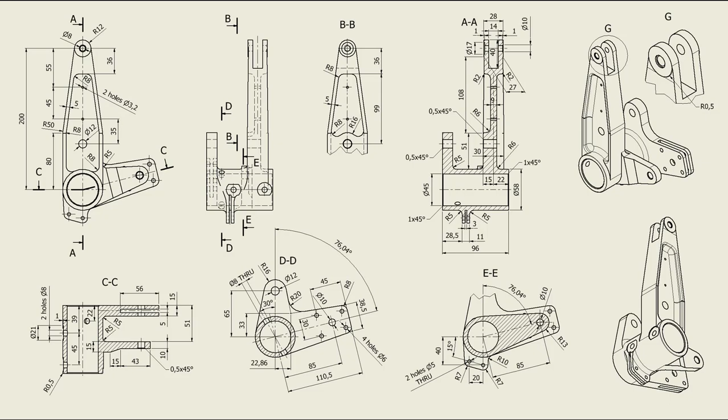I found a tutorial on YouTube in which this part is modeled. Rocky Lever is the name. In my tutorial you have the link in the description, so you can study that tutorial. As before, I saw a modeling strategy that I didn't like, so I decided to present my strategy to you.

You see, there are some features somehow complicated. If you look to the drawing, you see all the situation. These are two presentations of the object in 3D, and the dimensions are all over here.

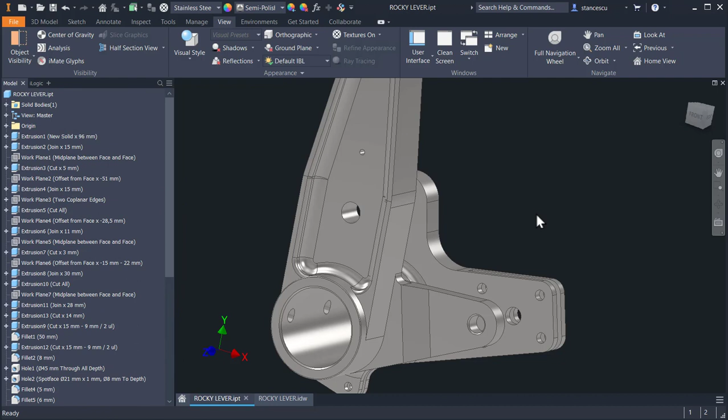The part itself is this. This is what we want to create, yes, with a lot of features. Look here. You understand that I created myself the drawing and this part. We respect the drawing and we create the part as usual. Let's go.

The first sketch is placed in the XY plane. We create a circle with a diameter of 58, and then we draw a contour. Take a look here where you see what I want to do. This contour I want to do, dimensions are here.

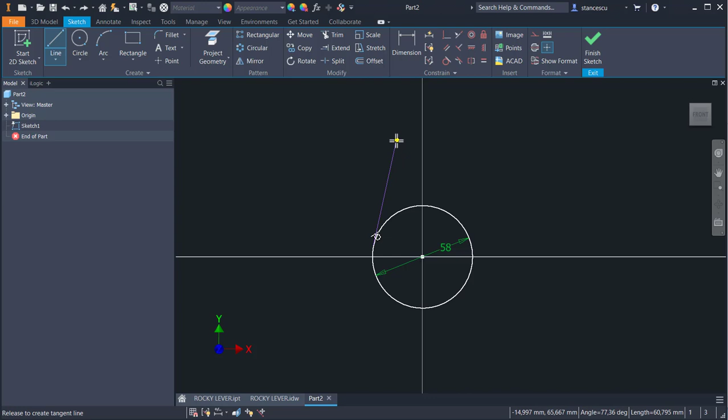We select a point on the circle, click, keep pressed the left button, and then we draw a tangent. Now, also keeping pressed the left button, we draw an arc, and then another line, another one, and the tangent as final. Is this difficult? I think that everyone can make such a simple thing.

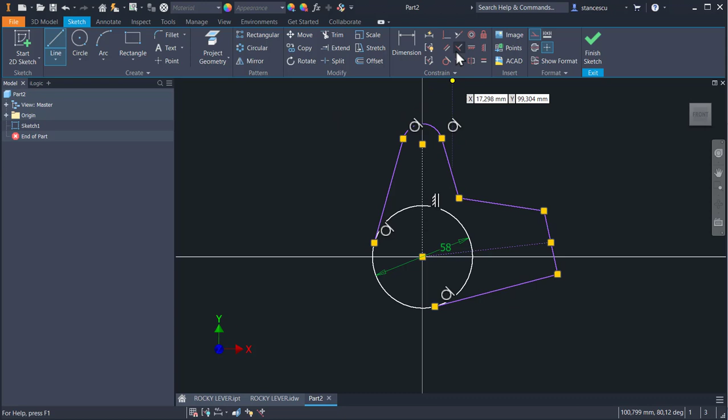I enable construction line and I draw a vertical line. You see the mark of vertical and a line to the center green of the other line, as you can see. I apply perpendicular between these two lines. I disable construction. Now dimensions.

Radius of 16. Distance from the centers 65. This line with this at an angle of 76.04.

This point at a distance of 22.86. In the mentioned tutorial, this dimension is missing, even if it is placed in the drawing. This is 33, and now we apply here 38.5 dimensions in the drawing.

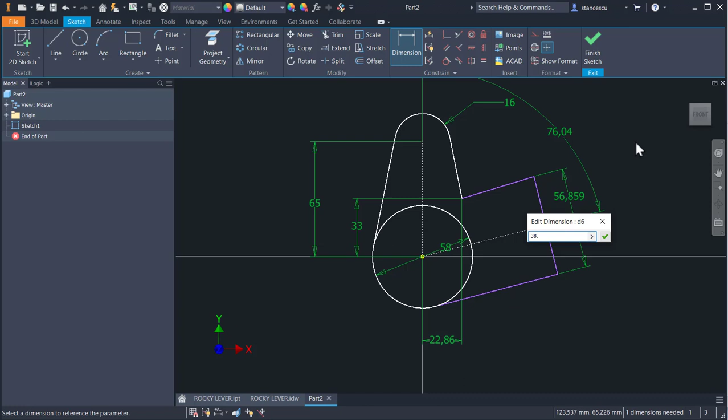The length 110.5, and this is white. This means fully constrained, as you can see. Okay, we have two closed contours here. One is this and the other is this one.

We create two extrusions now. Extrude this on 15, you see this in the drawing, and plus this one of 96.

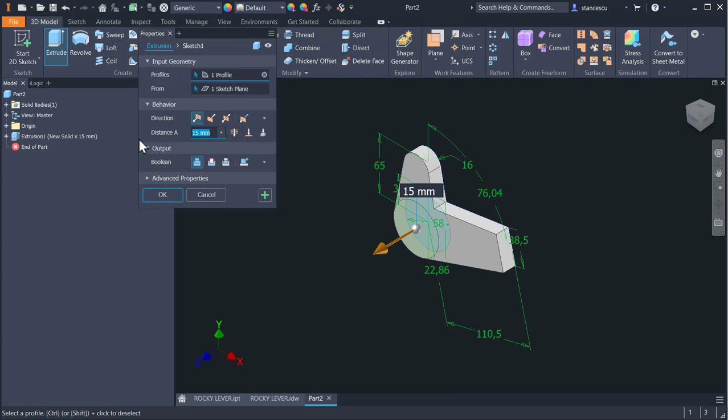Okay, F6. Now I want to apply material because I want to see the final presentation from the start moment. Stainless steel austenitic, and I accept the semi-polished appearance of the part.

Now, if you take a look at the drawing, there is a fillet here with the radius of 20 and two ends with radius 8. This is 20, plus this is 8, as well as the other.

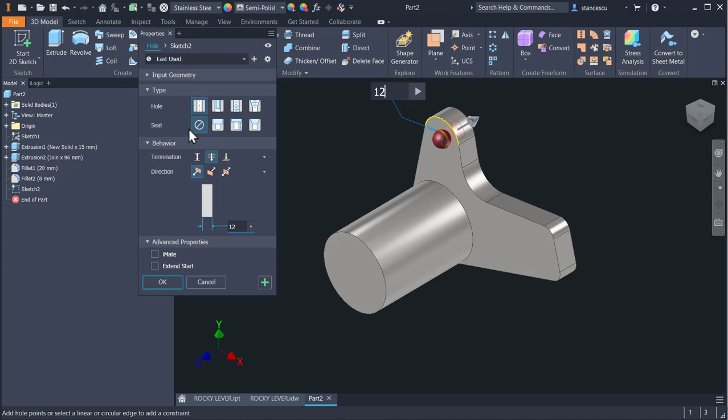Okay, now to finish this feature, I apply a hole here. This is the face, this is the center, and the diameter is 12 through. Okay, now I want to make a cut.

This 56 and a thickness of 5 in the middle of this extrusion. Then let's create a midplane between two planes, these two planes. Then a sketch F7 with a single line between these two lines, but parallel to the end line at a distance of 56.

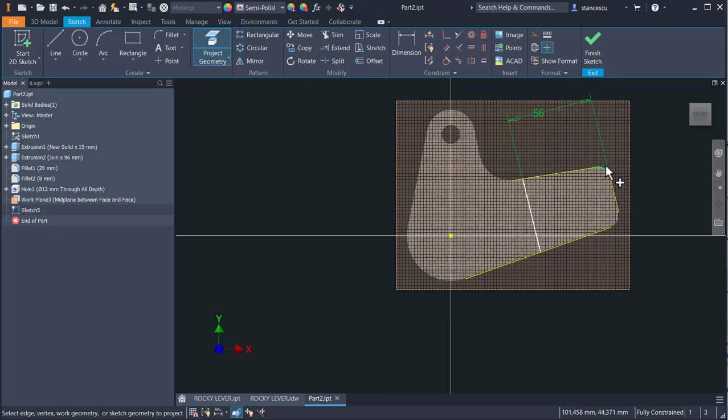Good. Let me project these two arcs to have a closed contour, and then extrude symmetrical with cut on 5. Okay, this plane is no more interesting. Good.

Now let me create these 4 holes, then this one. Sketch. We have 2 points. We add a line, again a line, which is also parallel to this line at a distance of 45.

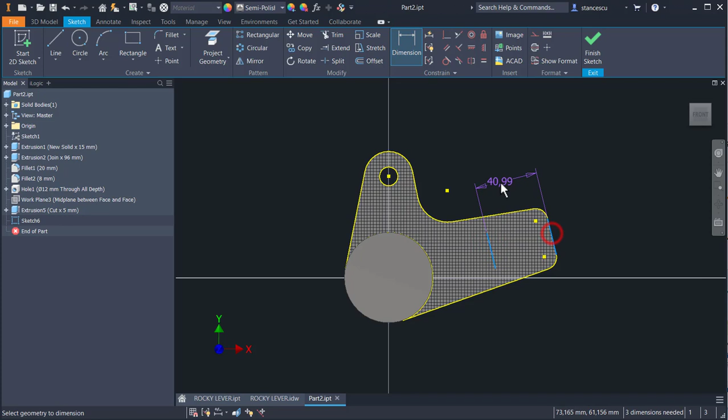F7 to see inside. I draw a line between the center point and this midpoint to apply coincident the midpoint with this, and here 30. I place 2 points at the ends of the line and other 2 here to have no problem with selection. Fully constrained.

Finish sketch. Holes of 6. All of them are selected automatically and they are through. Yes? Okay. The other one is in the middle.

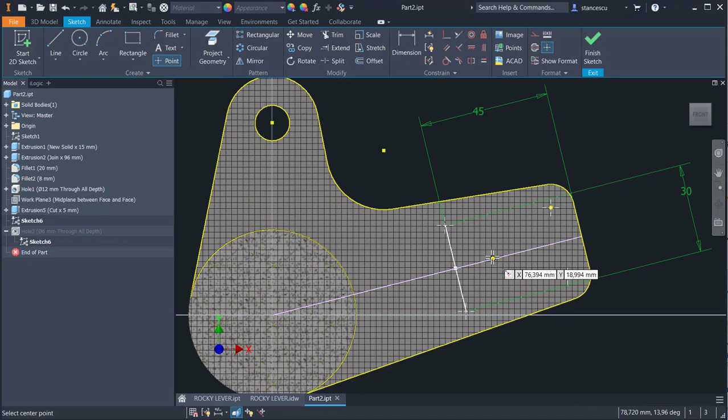I reuse the sketch, make it share. Why? To use that sketch, F7, to place a point on the line and then a dimension of 85.

Finish sketch. Hole 10. This time is 10. Okay. The shared sketch must be not visible because we don't need it.

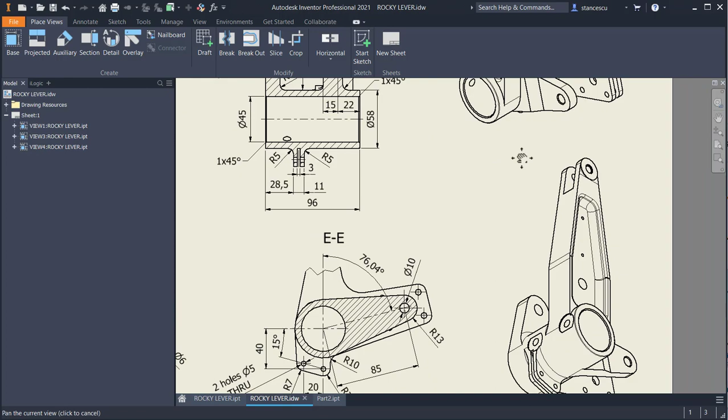Good. Now we focus on this extrusion, which is here or here. Yes. The distance is 51. 15 is the thickness, and then we'll cut this. So let's create this contour at 51.

Plane minus 51. Sketch F7. Project. Oh, but I want to project all the circle, so I apply again F7, project geometry, this, and F7 again. Yes, this is a little trick.

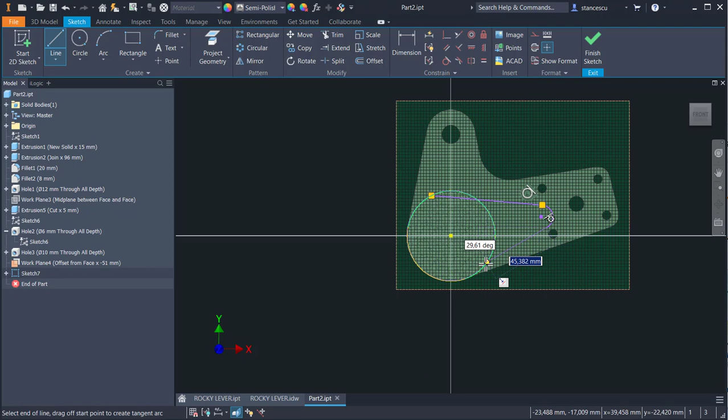Now I draw a line from a point on the circle, then an arc, and go back to the circle. I apply tangent between this and this. Okay. I draw again the line between this and the midpoint.

I make this construction line and apply coincidence between this. The radius is 13, and the distance between these 2 points aligned is 85. You see, exactly over this, but because we have 85 in 2 places, I have to respect the independence of these 2 features. Finish sketch.

Extrude this contour the other direction on 15. F6. Now we apply the cut: 43, 15 and 10 at the start.

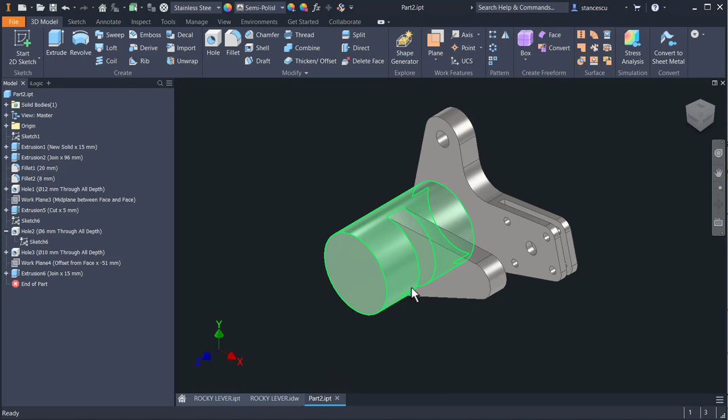We have to create a plane between these two axes. Axis, axis. I activate plane, create axis, this is axis, create axis, this is the axis, and now look at the plane.

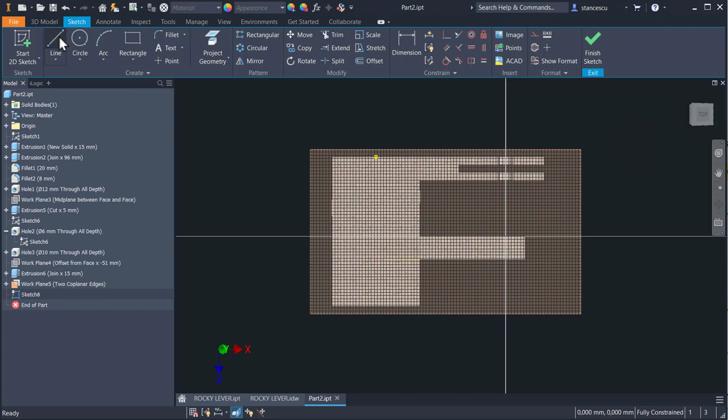I want to have the same position, so I create the sketch here. F7, I project one line, two lines. I make them construction lines, and I draw 1, 2, 3, 4.

Dimensions 10 from this to the end, 15 here, and 43 the other. It's fully constrained. Extrude the sketch, symmetrical, cut all the way.

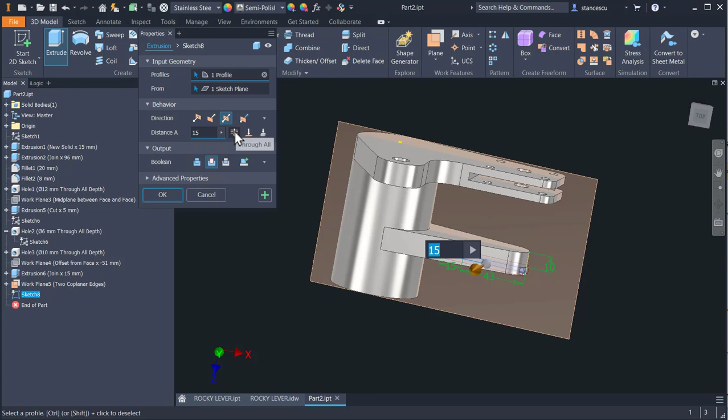Now plane. F6. This feature has also a hole with a chamfer. The hole is of 10 in the center of this cylindrical face, 10 with the chamfer. Hole, face, center, 10.

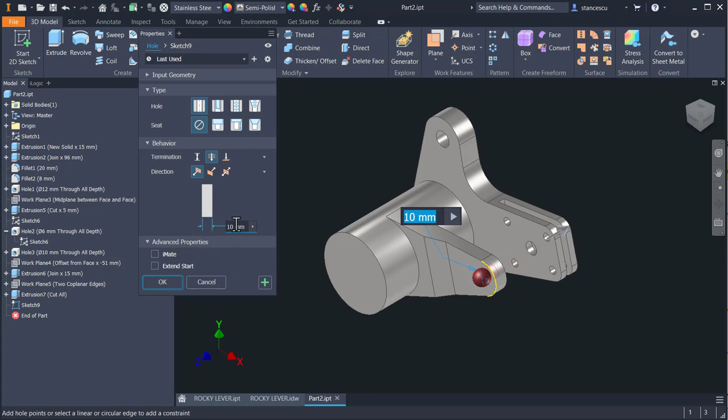I know that the hole is exactly aligned with this, but I apply 2 because the features are independent. And now the chamfer of the 0.5, and we finished also this feature.

The next is this one you see here, which is dimensioned here, and it is placed at 28.5 from the other end of the, oh no, from the bottom as well. Yes, and the thickness is 11.

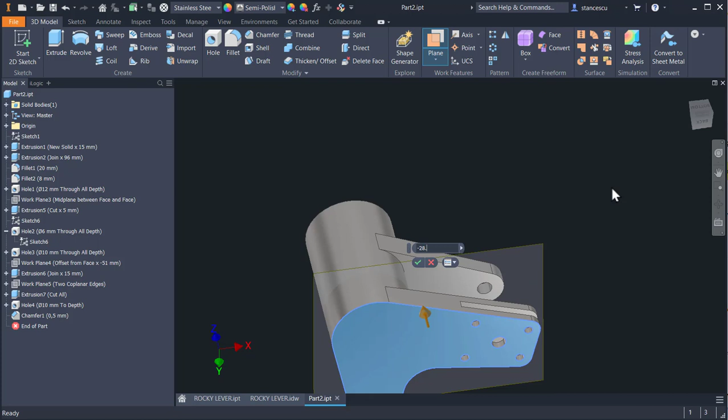Let's create a plane at minus 28.5 where we draw a new sketch. We project, you know the lesson. I project and then F7, and I have the full circle here.

Good. A line from about here, tangent, an angle, and to the circle, which is vertical. This end line is vertical. I project as constructive or construction the x-axis. Why? To place here an angle of 15.

I move a little this point to have room for applying these two fillets on the sketch. You see, because we need to have points for dimensions 20, and this one is on the same vertical with the center point.

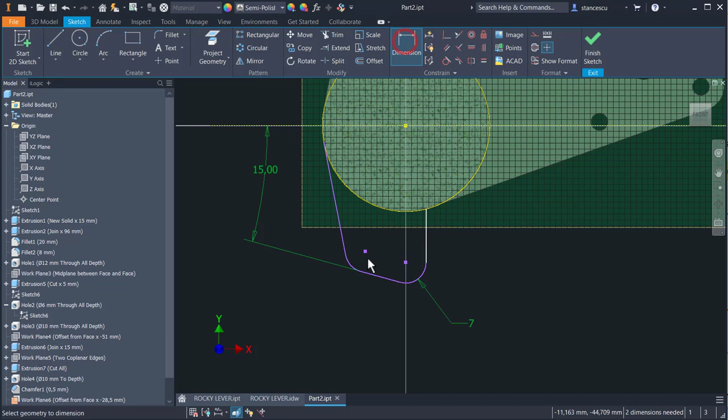The distance between this point and the projected axis is 40. This dimension is 20. And that's all. Very nice. Finish sketch.

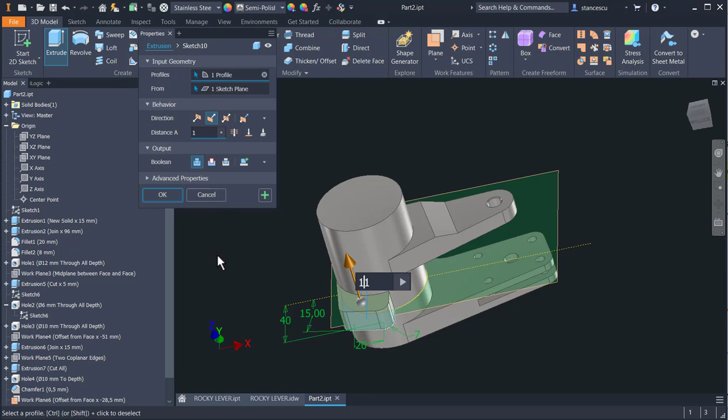Extrude. This area, the other direction, 11. Okay.

Visibility, and as you can see, this fillet is here for you to know, between this face and the cylindrical face. Good. Let's go there. Oh, this is the place. Radius 10. Okay.

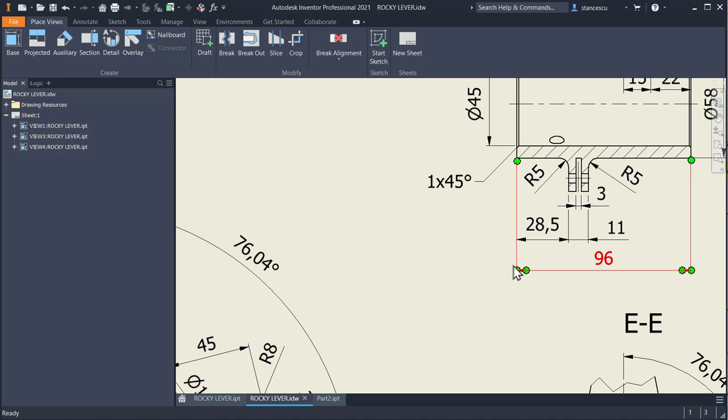Now let's make this cut of 3 in the midplane. You know all about midplanes between two planes. One is this and the other is this. So we create a sketch here, F7, because we have almost all we need.

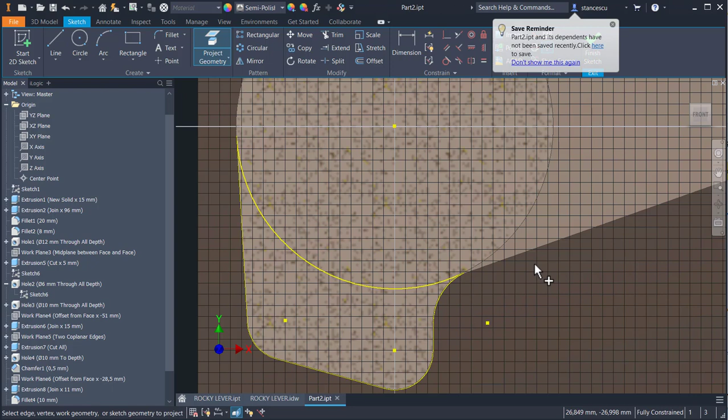We need to project this arc, yes, it's here, and also all this face. To apply extrude with cut symmetrical of 3. Yes, this is the 3. Okay.

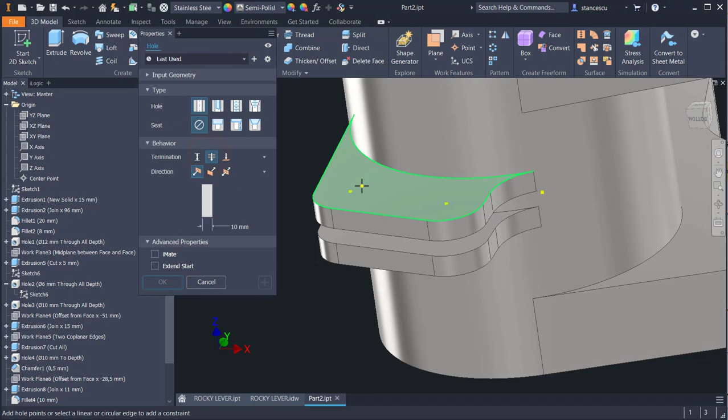Visibility. Now there are 2 holes there. Let's place that 2 holes of 5. We create a sketch, we obtain points and hole through in this point of 5 and also this point. Okay. Good.

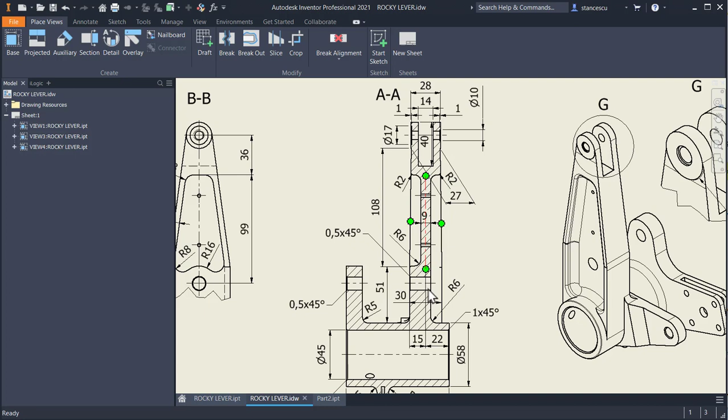We go now to the most important feature in this tutorial, which is this. As you can see, it is 30 millimeters thickness, and the midplane, again a midplane, is at 22 from the other end, not the bottom, the other end.

So let's create this plane and then a contour with two tangents, vertical, and a circle of radius 12 placed at 200 and the dimension 80 to the corner, 22 from the other face. This is the other face, minus 22.

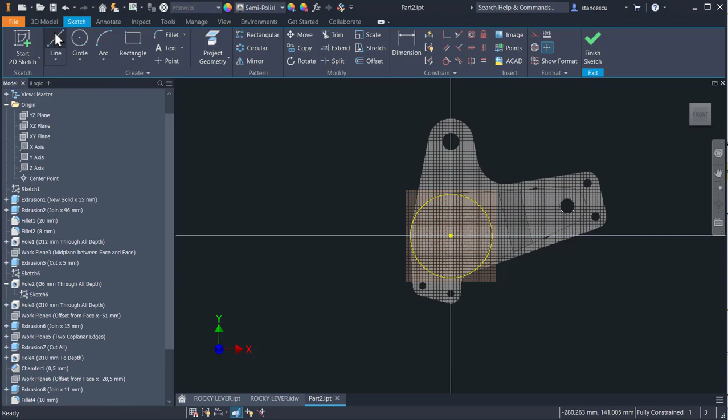Sketch, project geometry, F7, line from this quadrant, this vertical, sloped, keep pressed the button, arc, slope, and end, tangent.

Equal between these two lines, and the same vertical, this is a vertical, between this point and the center point. Good. And also vertical is this line. Radius of 12, distance of 80, and of 200. That's all.

Finish sketch, extrude this, symmetrical 30. Okay, F6.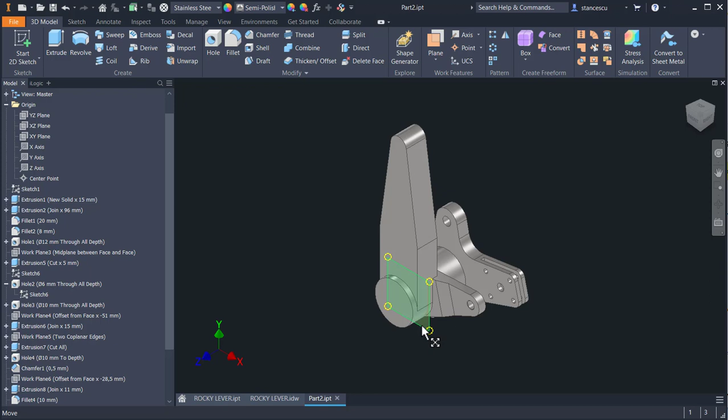Now I take advantage of having this plane. I make it auto resize, and I create a sketch because you see there is a cut here. Yes, 40 with 14. In this plane we draw a single line between a face and another face. Yes, it is horizontal, as you saw.

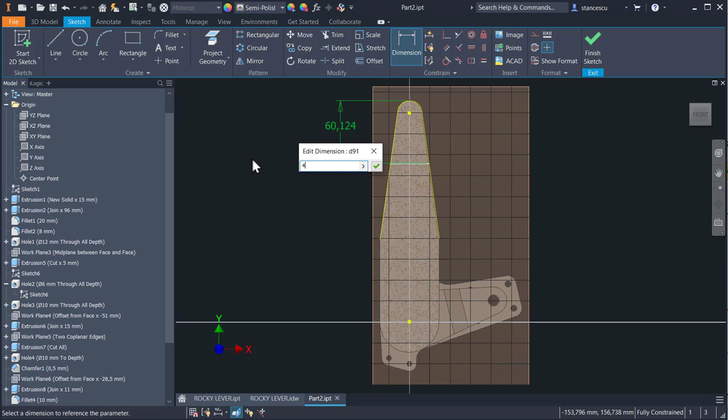Look here. I project geometry. Dimension from the line to the top, 40. Finish sketch.

Extrude. Cut, symmetrical, 14. Okay, visibility.

Now I apply the external fillets, symmetrical of 50, to finish the external. So radius 50.

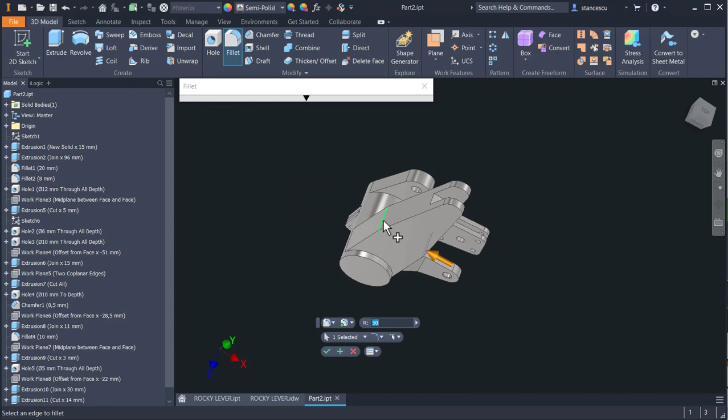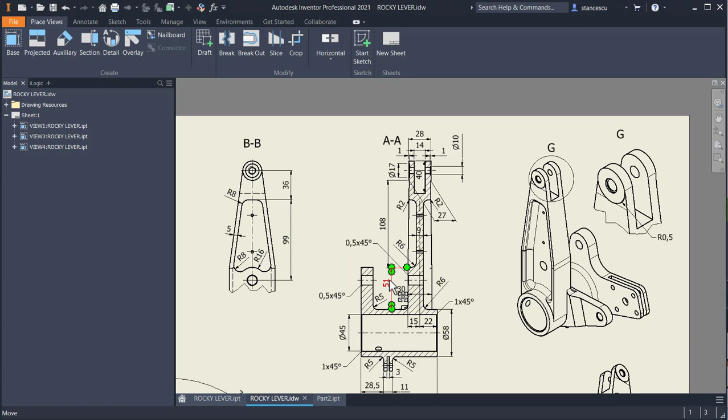And 50. Okay, the next is an interesting thing. As you can see, there are some lines here, this one on a face and this one on the other face, limits from 51 from here, but we can calculate 29 with 51 is 80, so 80 is this. So 80 from the center, 108 to here is a sloped plane, because this is 30 and this dimension is 27.

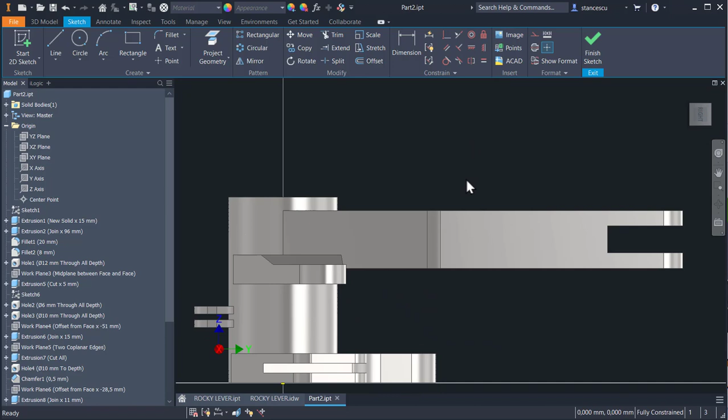We have to create a small area here and mirror it on the other side to obtain these sloped faces. Let's do it. We select the plane YZ, which has horizontal, vertical. Let's rotate this to have the real situation with the horizontal, vertical.

F7. And now a line from this end to somewhere, a sloped line to here, and a horizontal or parallel one, finishing with a closing line.

We know dimensions, yes? This is 80, and this is 108.

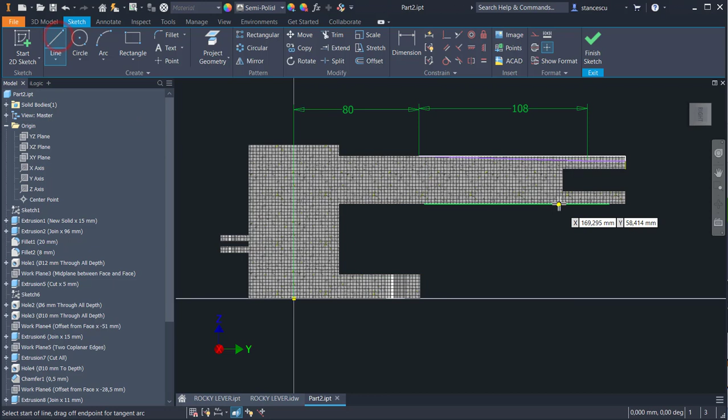We draw a line from the midpoint to this point. This dimension is not placed, and this I'll make the end on the same vertical to be sure that only one dimension is missing, yes?

We use this to create a mirror of all this about this line. Apply.

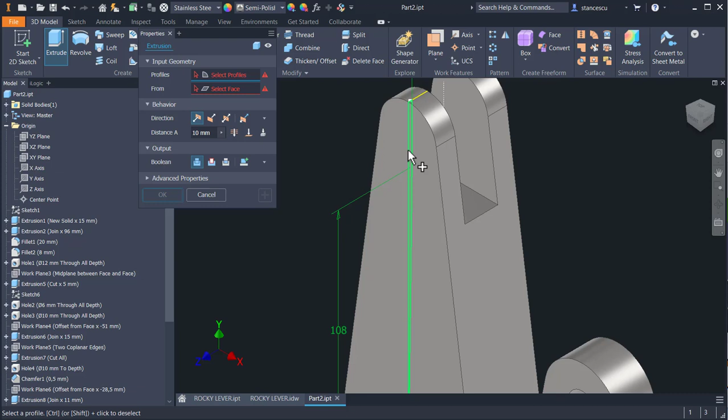Now the dimension of 27 here to finish the sketch. That's all. Finish sketch, extrude this pseudo triangle and another pseudo triangle, all the way cut symmetrical. You see? Okay.

Next, we create these pockets. The first is this one with dimensions given here. Radius 8 and 8 and an offset of 5 is here. Yes?

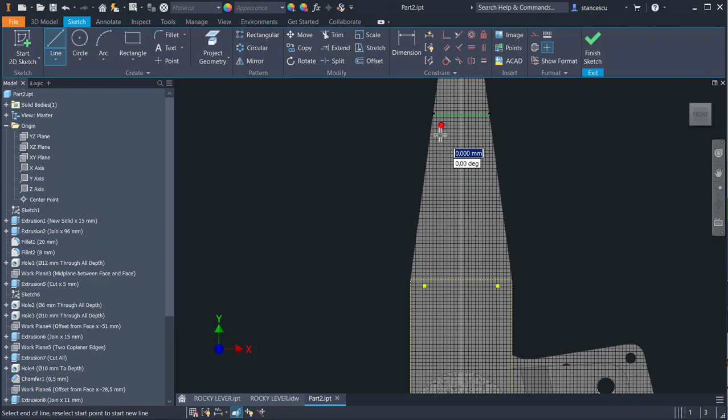Let's create this. We use this face for construction of the sketch. F7, everything to be construction, and we draw lines from here to here and to the circle.

Another line horizontal, another one to here. I am careful to make no parallel and perpendicular lines, but this is horizontal. Look here.

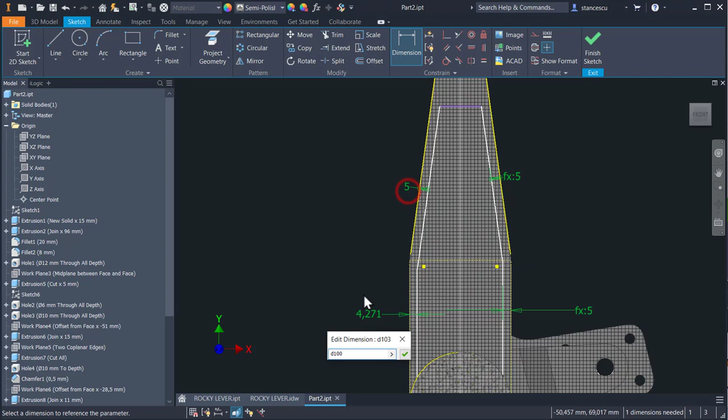Now parallel these two, vertical, this one and this one, dimensions of 5. I select this to be the same all over. Yes, now we are sure of all of them.

Other dimensions. I create now an arc before the dimensions, an arc with the center here and about here. Why? To apply fillet of 8, fillet 8 between this line and this line, these two, and also here.

The dimension is 36 and all the other are already placed. 36 to the center. I don't have a center. Let me project this to have the center for placing 36 here. Finish sketch. What about the depth?

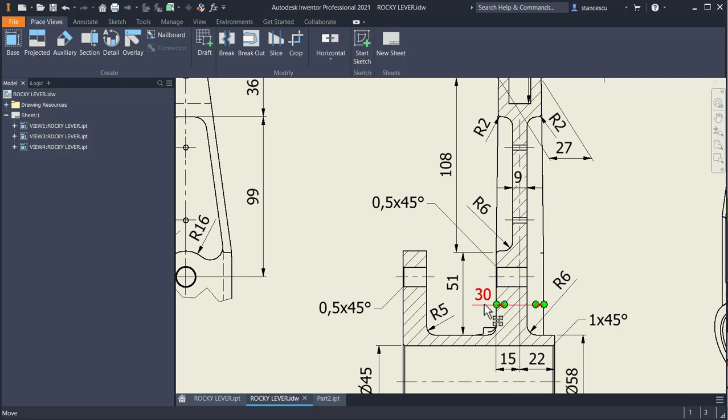We have to subtract 9 from 30 and divide by 2. Extrude, cut, (30 minus 9 divided by 2).

Okay, that's good. Now the other pocket, which is presented right here. 36, 99 to the center for a radius of 16. 5 as well is here, and radius 8.

We turn the part, F7, all lines construction, and we draw lines here and arcs as well, like this, parallel, why not?

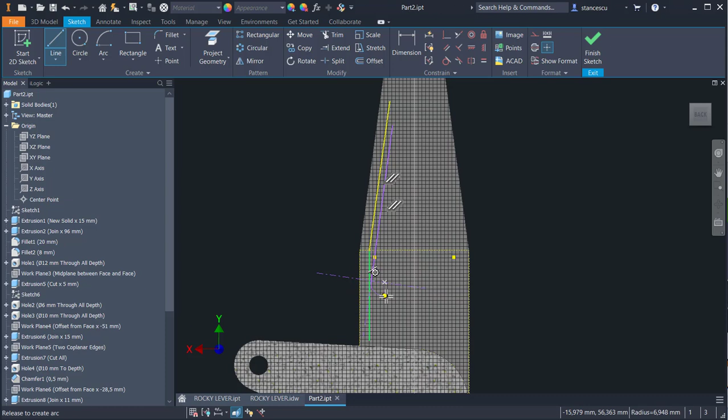Then I keep pressed the left button, I go somewhere here, I keep pressed and I draw another arc and another one, all of them tangent to each other, and lines, lines and lines.

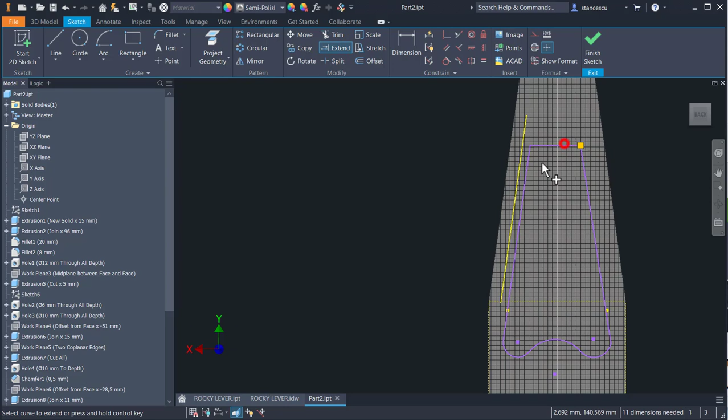Here is something I don't want to be. Extend and trim, I suppose, this end. Now we have a nice construction here.

Tangent must be the last because I missed it. And now these two are equal. This is with the center on the same vertical with the center point, radius 8 to the both, and 16 to the middle.

Parallel this with this because this is already parallel. Dimensions 5 and from this line to here.

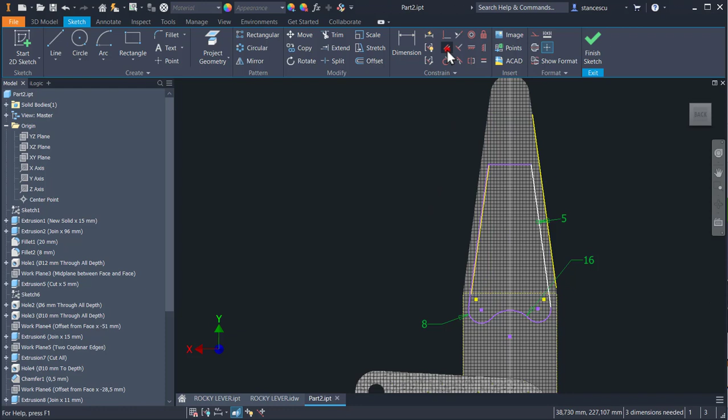Oh, they are not parallel. Parallel this our line, this one with this one, to place dimension here. But there is a line which is not wanted. I select it, look careful, and I delete. It has no constraint, or it has.

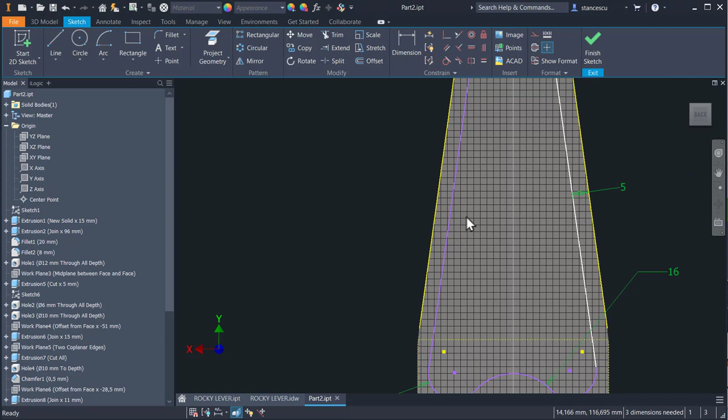It has. I erase this, also this, and then the undesired line. Yes, this is the way you can lose an unwanted line. Now the dimension is the same with this.

Okay, fillet of 8 already is 8. And now dimensions 36 and 99.

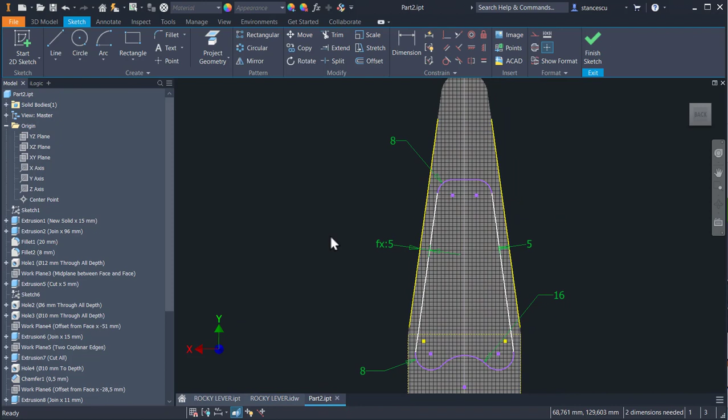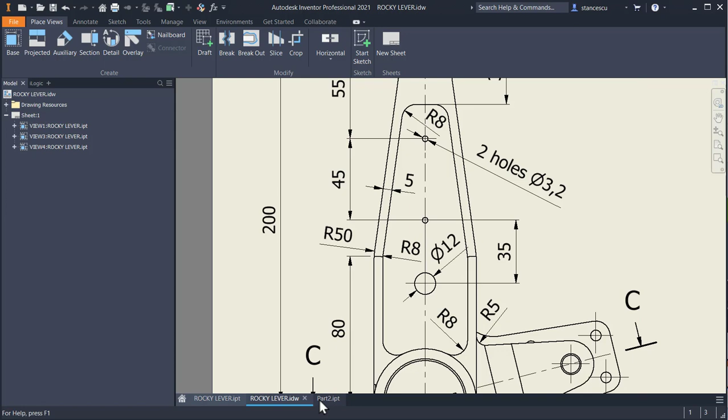Okay, there are some fillets here, 6 and 2. Yes, but before we have to apply here radius 8, because this is made with a milling tool which has the same radius all over. Yes, this is R8 as well to the other face. Let's apply to be sure we did radius not 50 but 8.

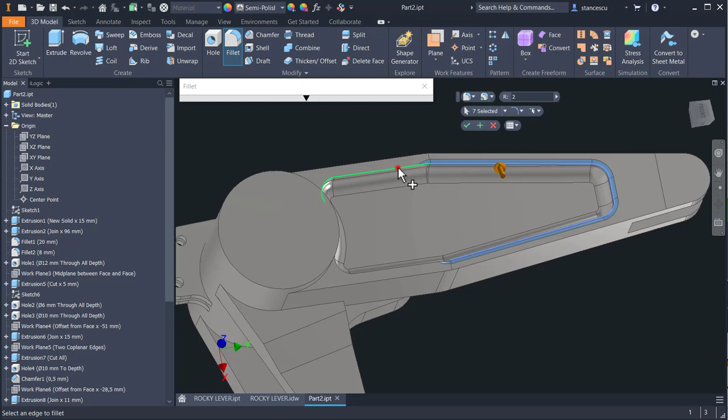It's small, but is necessary. And then radius 6 inside all over. Okay, very nice. Plus this one, which is 2. Also very nice.

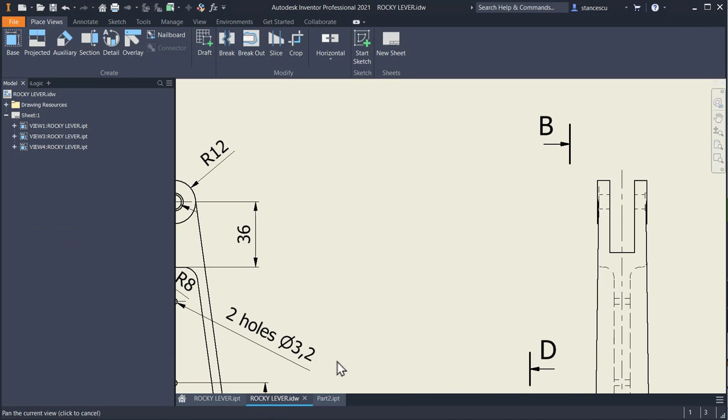Okay. F6. Let's go here. Here we have a boss of, as you can see here. Yes, or better you see it here.

This dimension is 28 from 27. That means that 0.5 is here. Indeed, there is a radius of 0.5 on this edge of the part. So let's create a boss with a distance here 28 minus 27 divided by 2.

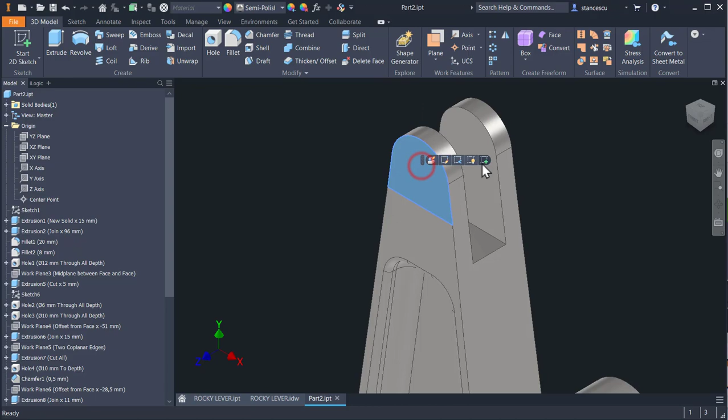We know the value but we don't make calculus with our head. Yes, this is our rule. Circle and extrude.

The value is 28 minus 27 divided by 2. Okay, now we can apply mirror because we have the mirror plane, this one. Yes, I don't make it visible to use it.

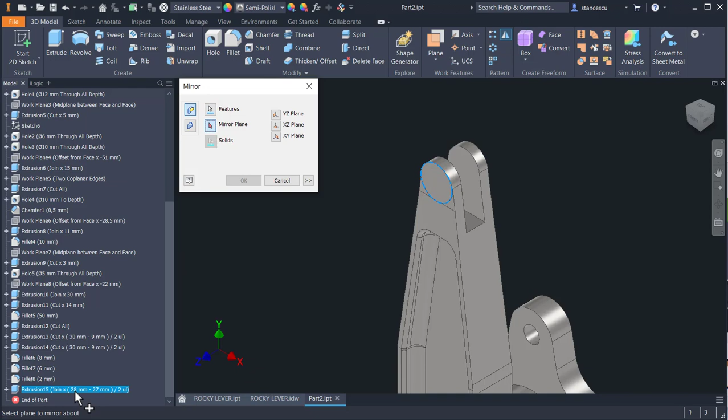Mirror of this feature about this plane, and you see the result here. Okay.

Now I apply a hole. You see the drawing. Notice the spot faces here, 17 by 1 and 10 by 1. 10 is on this face or this face, but the hole is 8. So hole through face center 8.

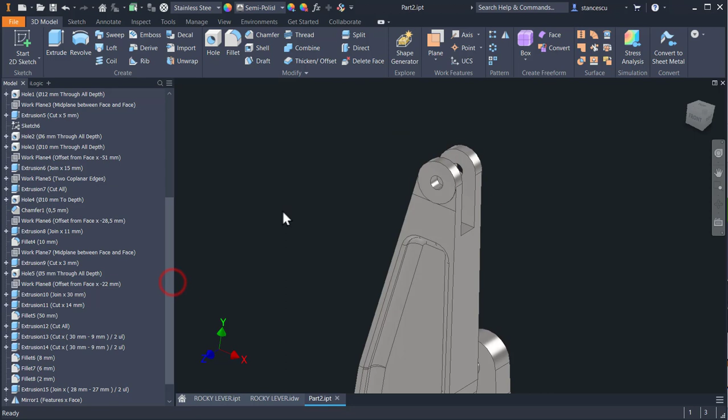Okay, then we apply 10 here, spot face, this is spot face with 8 inside, but let me show where. This is 10 and the depth is 1, plus the other face, this face, this center, 8 tab, 17. Okay.

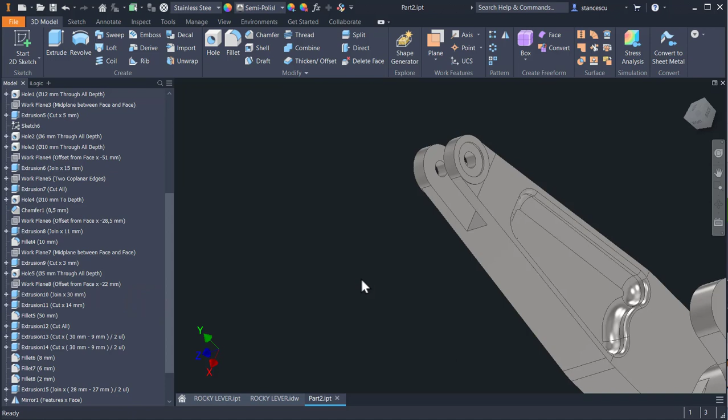Next are these 3 holes, 55, 45, 35, 3.2 and 12.

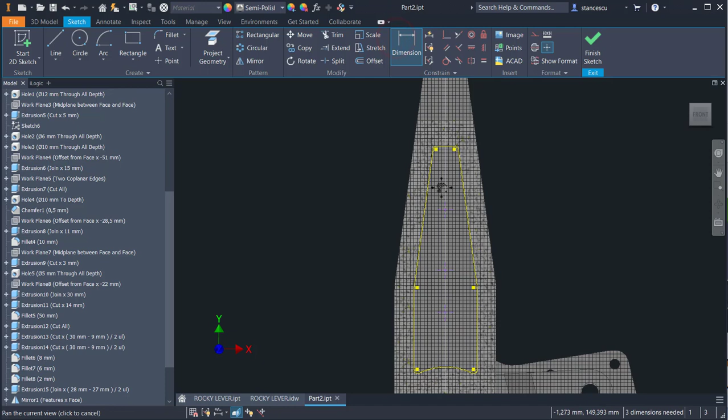Dimensions to the first 55, to the next is 45, and the last is 35, which is the same with the back. Yes, in the center of this. No problem. These are dimensions, we respect dimensions. Yes.

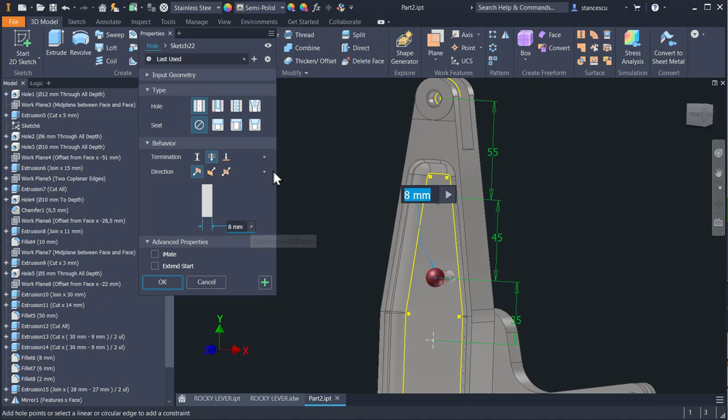Finish sketch. Hole. This is not now, so I apply control click on it. Through 3.2 are the first 2, plus this one, which is 12. Okay, you see two small holes and a great one, but aligned very exactly with the other.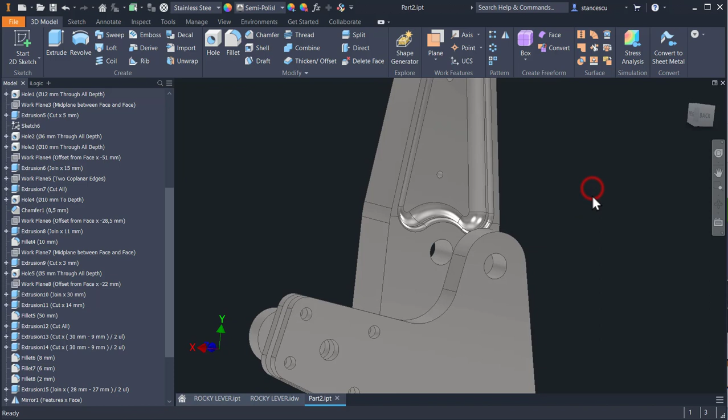Because we consider this independent, we place dimensions where they are placed in the drawing. Okay, the great hole here is dimensioned here 45 with the chamfer of 1 at both ends, and also a radius of 0.5 at the long end.

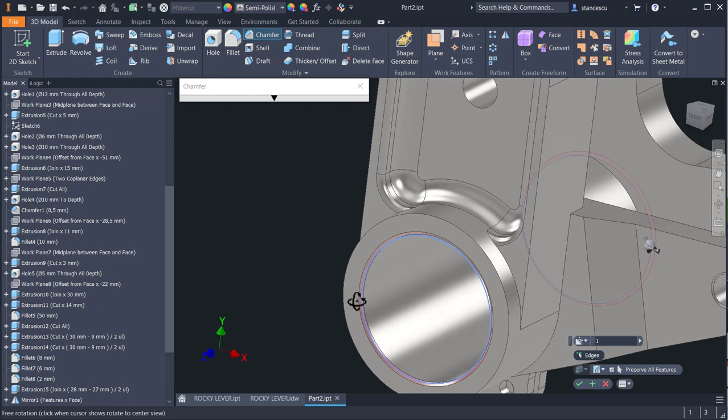Let's place them whole, this face, this center, 45 through. Okay, chamfer of 1, and also here. Okay, and this long end to be with a radius of 0.5 fillet, F6.

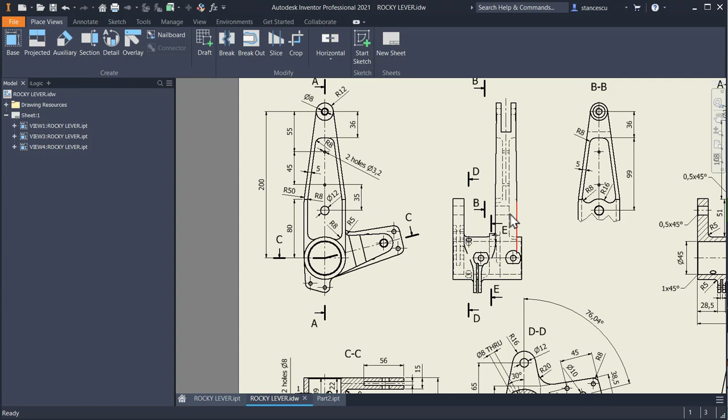Next are two interesting spot faces, these ones, which are placed on the cylindrical face, and you can see them here. As you can see, they are on this face. Yes, this face is this, and since we look just perpendicular on this face, we place these dimensions 39 and 45 from the bottom. I call this the bottom, I call this the long end. 39, 45, 21, two holes with 1 depth, and 8 limited to this face, not through.

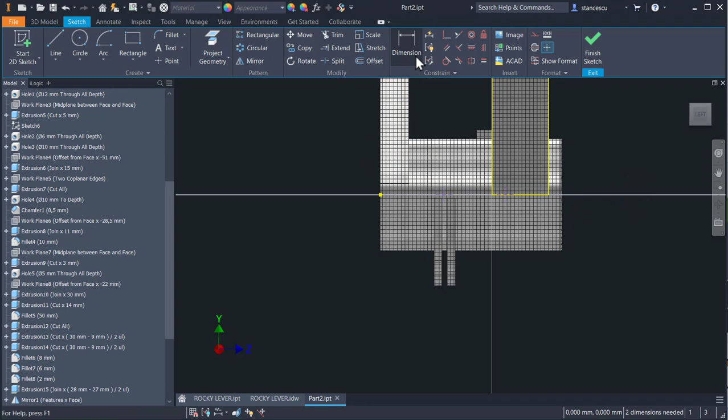I turn back the part to create a sketch which has 2 points, 1, 2, on the same horizontal with the center point, and between them we move them inside. We apply dimensions 39 for the first and 45 for the second.

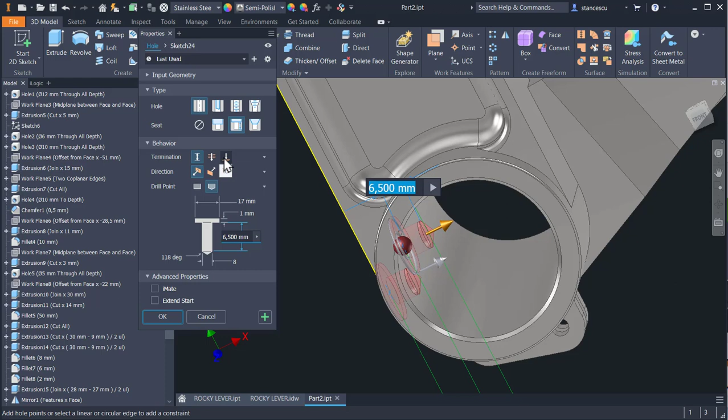Finish sketch, and then spot face with 8 the inner hole, tab, not All but To, and I select the face for To. I don't use this arrow to place the ends somewhere inside, because I don't know if the designer decides to change the diameter of the hole. If I place this here and I say that's okay, it is not okay. So I apply To and I select the face. If the designer decides to change the diameter, nothing is destroyed.

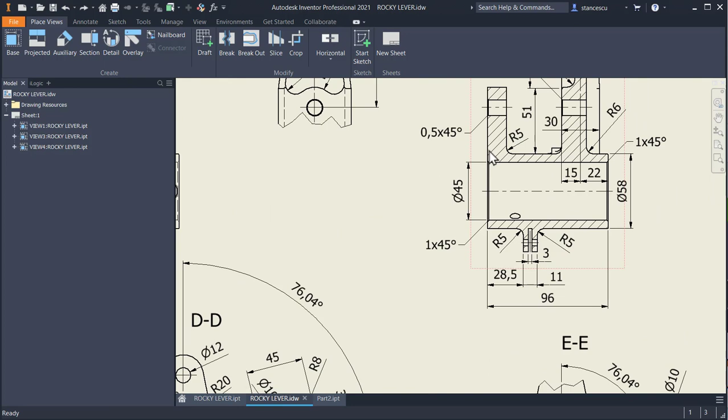The next is tab 21, and the depth is also 1. Okay, you see now the shape of these two spot faces. Next I apply fillets. You see radius 5 here inside, also radius 5 here, also here, and in this small corner which we can see right here. Let's do this.

Radius 5 to this, this, and in the bottom here also.

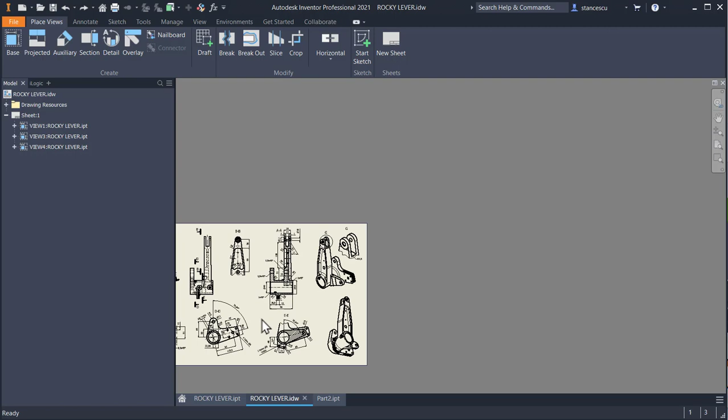Another feature is this hole at 30 degrees through. It is placed just near the last fillets, so we have to create here a circle, and to extrude symmetrical we create a work plane based on this plane and this axis at 30 degrees, which is -60. I write here -60 to be clear. This is the place where we draw a circle

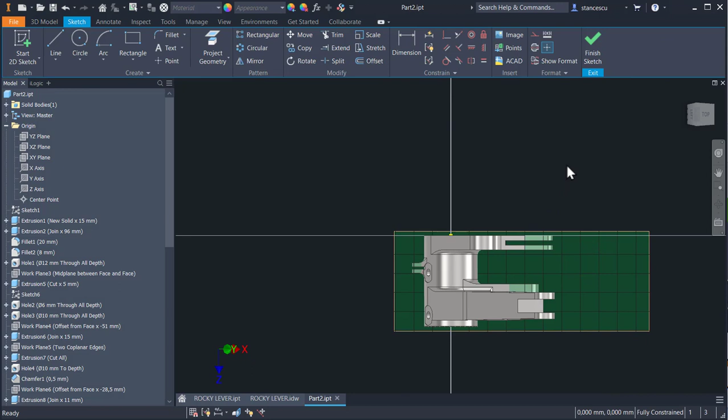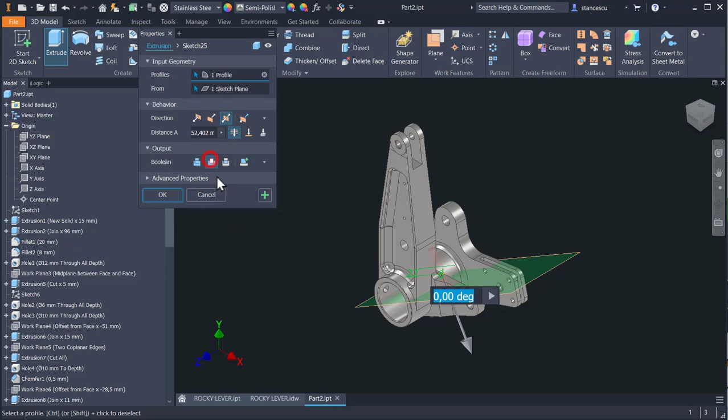with a diameter of 8. Same vertical, which now is horizontal, at the distance of 22. You see this distance here, yes? This. Good. Finish sketch. Extrude. Symmetrical. Cut. You see the hole is through. Okay.

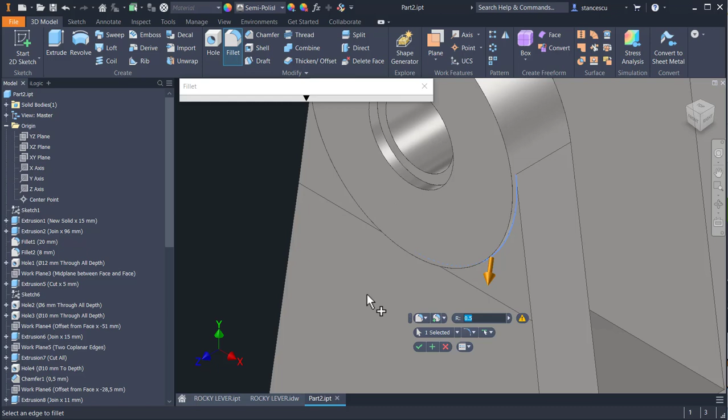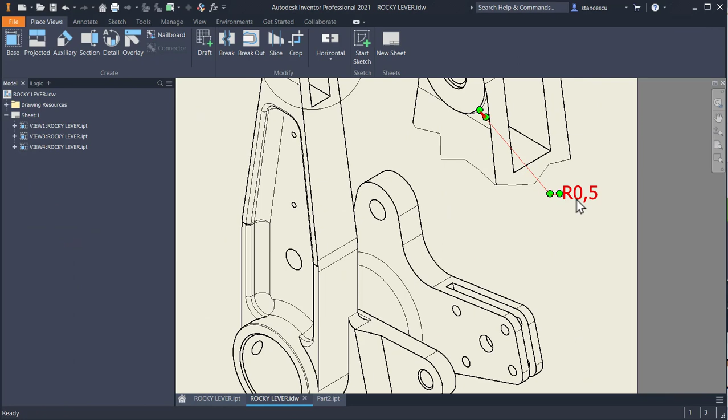The last feature is this radius of 0.5 near the bosses. Let's create this last feature. I select this 0.5. I see an exclamation point here, but when I select the other, it's okay. I do the same on the opposite face with the same radius. That's all, my friends.

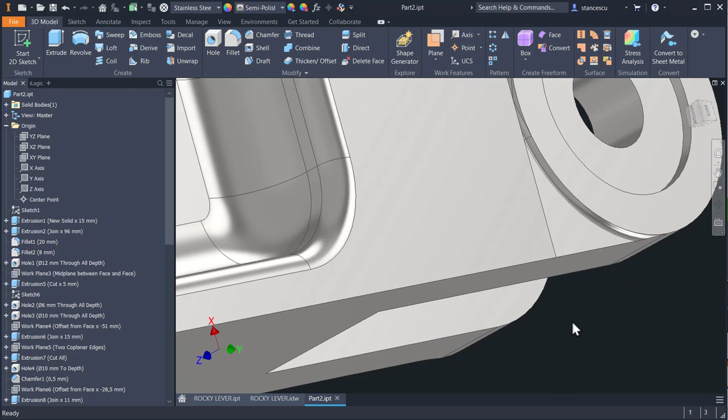Let's see what is the properties. If you model this part, you have to take care of the volume. There is an error, estimated error, but this is the precise element here.